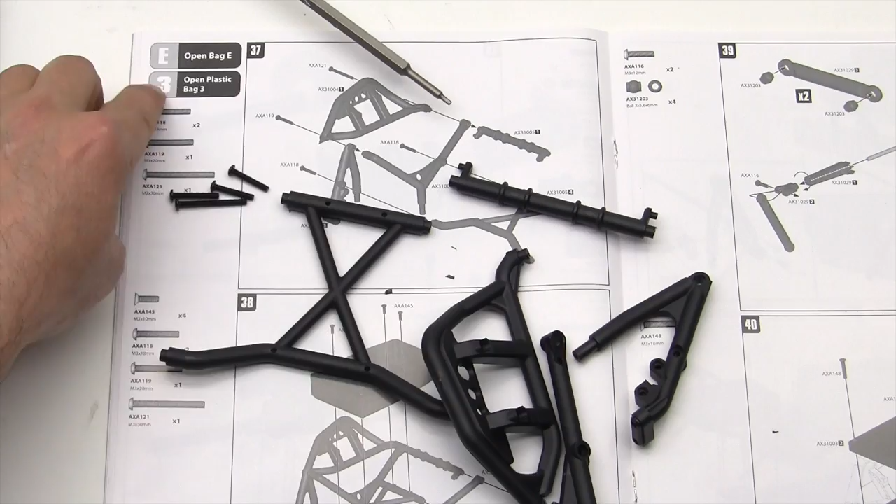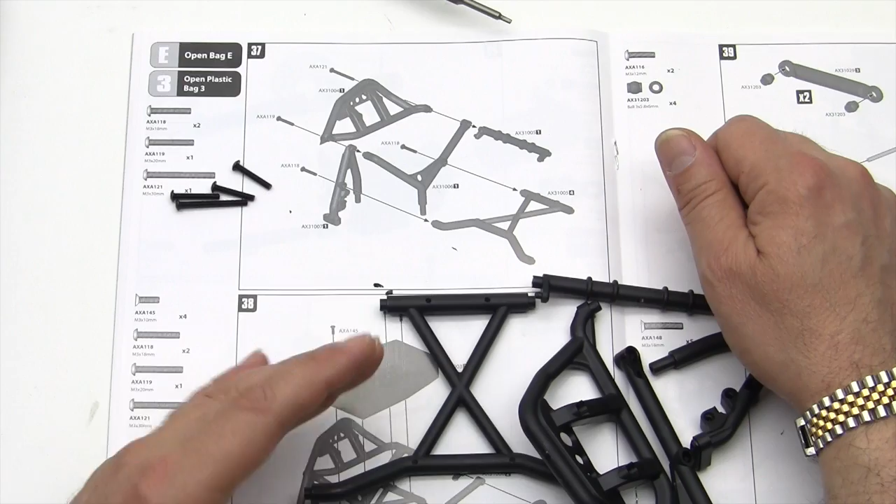All right, let's get rocking on step number 37. We're going to open bag E for the metal parts and bag 3 for the plastic parts and get all your stuff put together. Note that we're working on step 37 and most of the parts are -1 on the tree. We have -1, -1, -1, and those are all going on this side. For the next step, the -2s go on the other side, so make sure you don't get them confused.

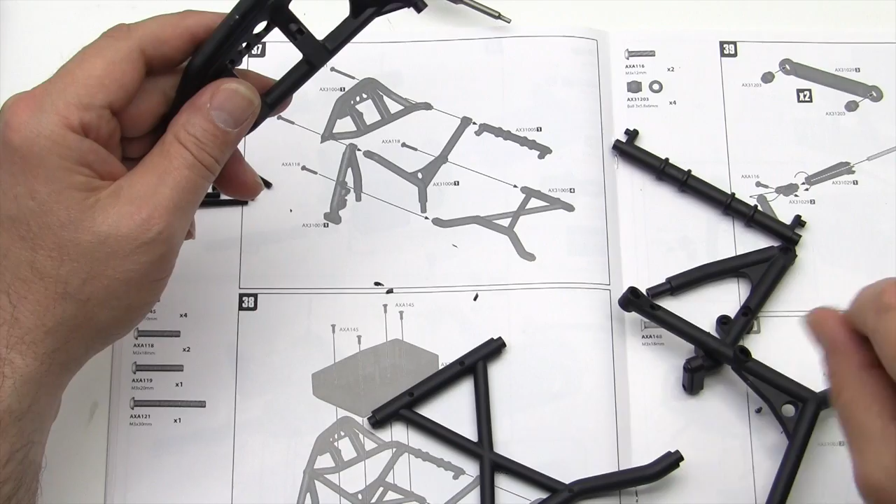Let's take the rear suspension strut holder here, and this is going to turn in this direction. As you can see, this is going to face the inside. We're going to grab the Y looking unit here, and it is going to fit in this position here. There's a little post and a hole, let's go ahead and put that together.

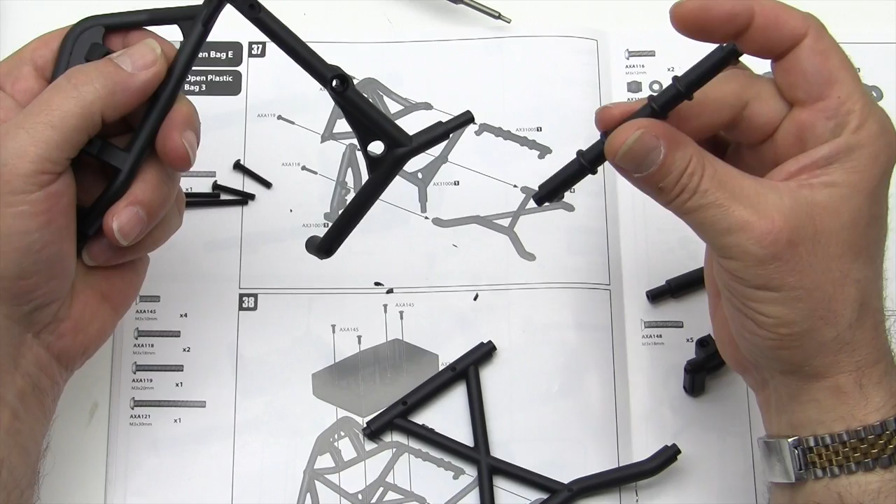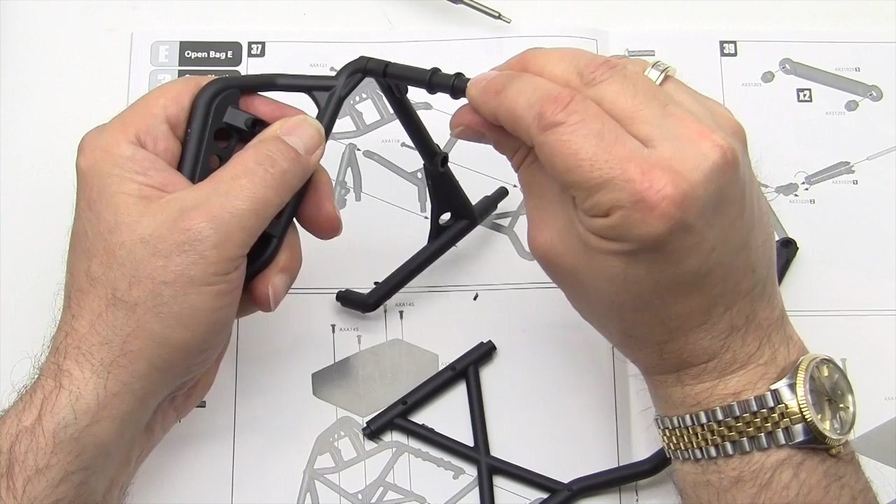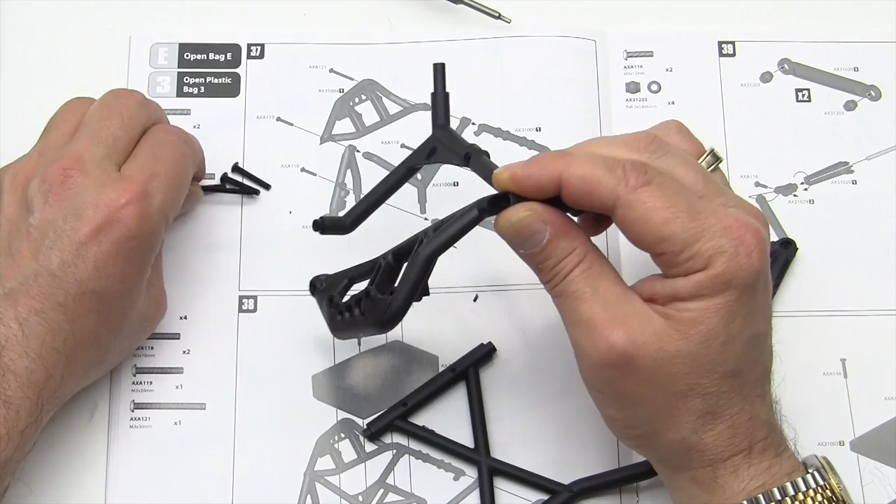And then we will grab the AX31005-1, and you can see there's little feet on here, and those go to the inside and go into these little holes here. Just like so. And we're going to take the longest screw, which is the AXA121, a 30mm screw, and we're going to insert it to hold all of these pieces together.

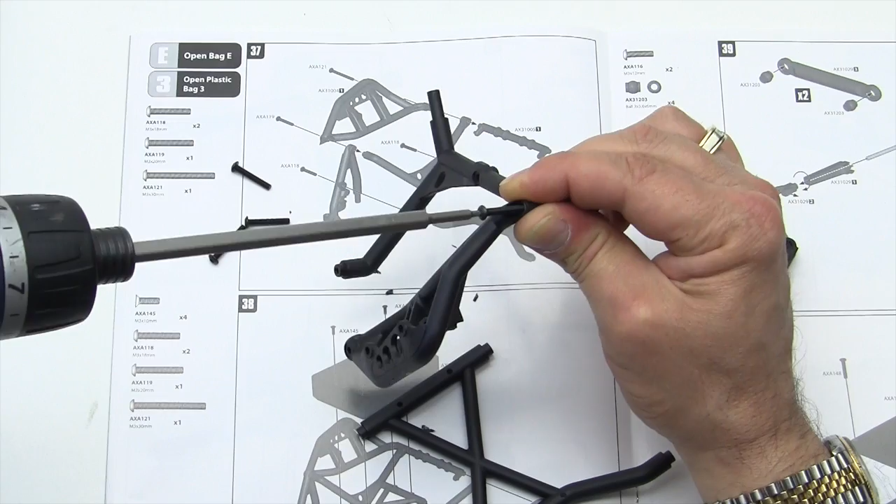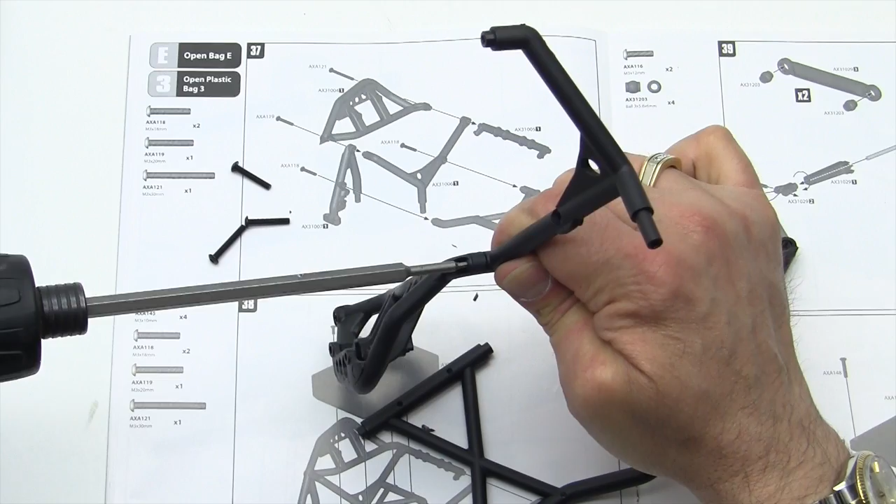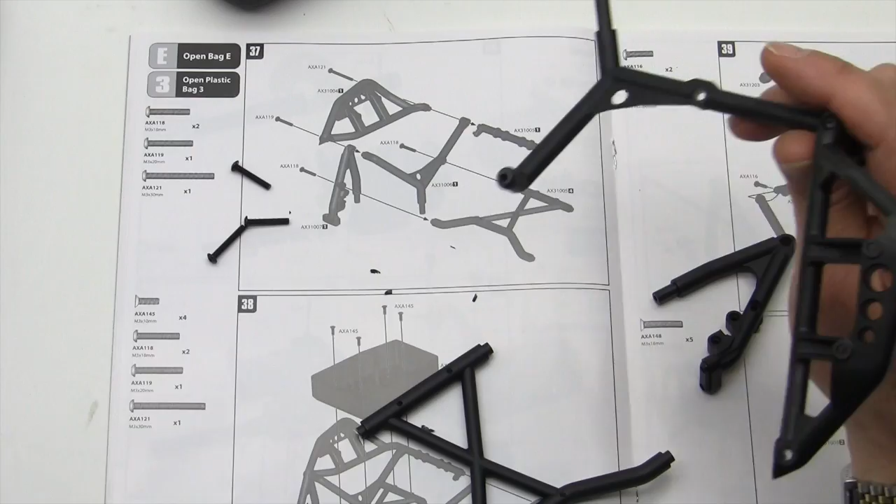You'll notice that this plastic is actually a lot softer plastic, and you're going to want to be careful that you don't over tighten anything. So just till it touches, and then follow up with a wrench if you're using a power tool, just to make sure that it's tight.

Okay, let's get everything back into shape here. This is what it looks like all held together.

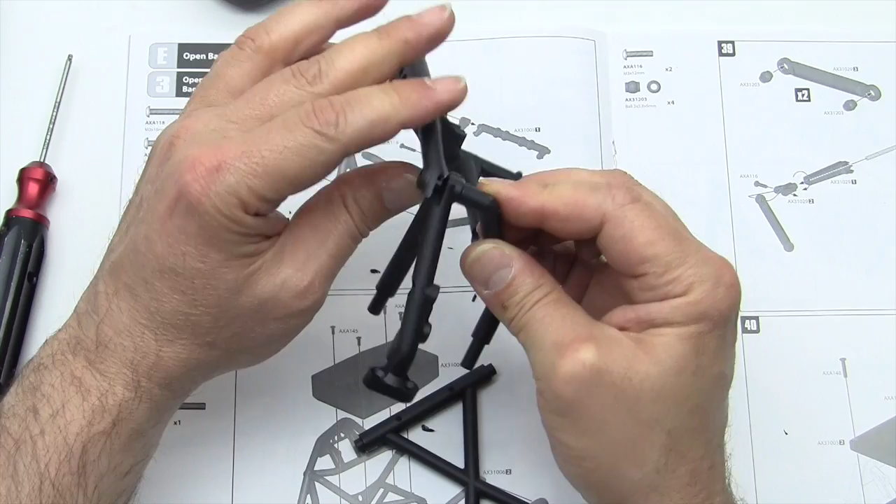Now we are going to take this piece here, and it is going to go in this direction with the feet pointing towards the back. See if you can get a better look at it here. It has a post and then it has some feet, and that is going to sandwich in between these two parts here. So we're going to press that in and then press that in. Let's go ahead and rotate that around so that everything lines up.

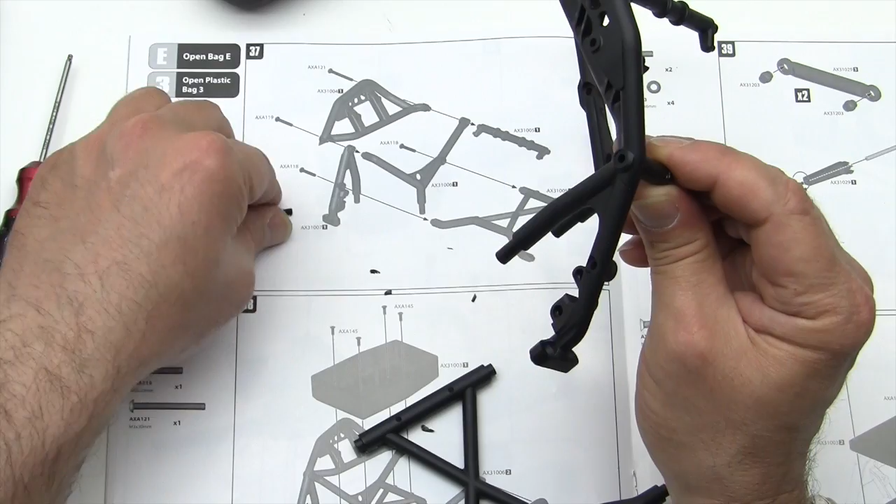And we are going to put in the number 118 screw, which is the 18mm, so it's one of the two shortest screws. Cinch that down. Okay, so that is what we have so far.

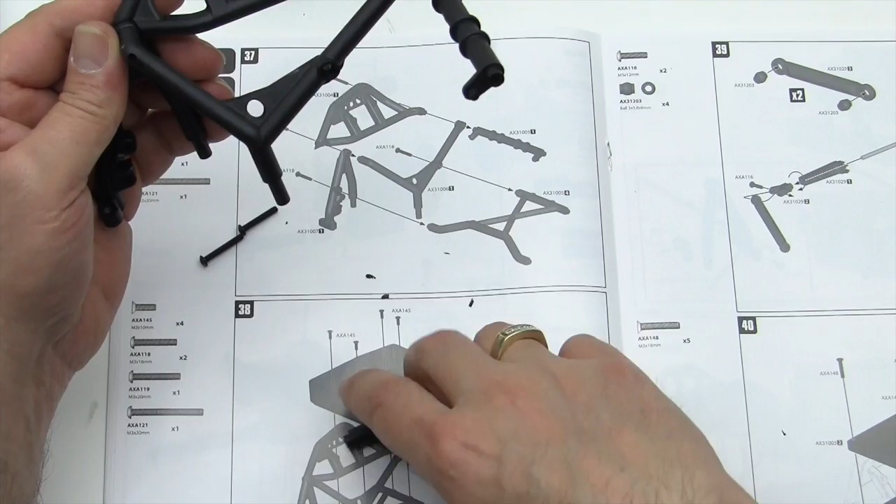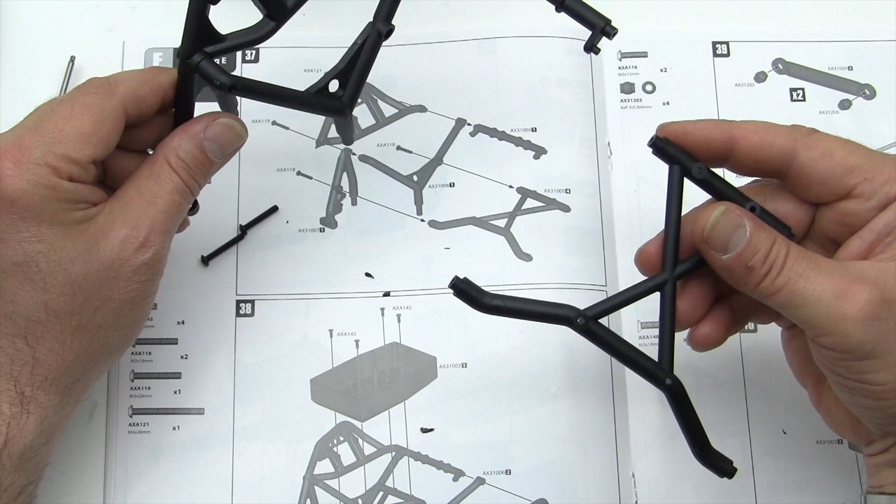Now let's take the cross brace, and let's get some of the other parts out of the way. As you can see, it comes forward and it comes down, and then we have a short end and a long end. This is going to go into this hole here, like so, into this hole here, like so.

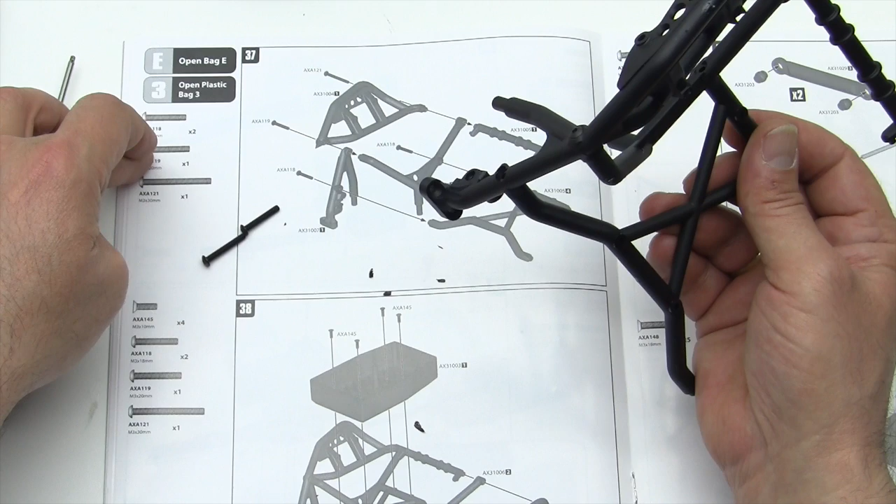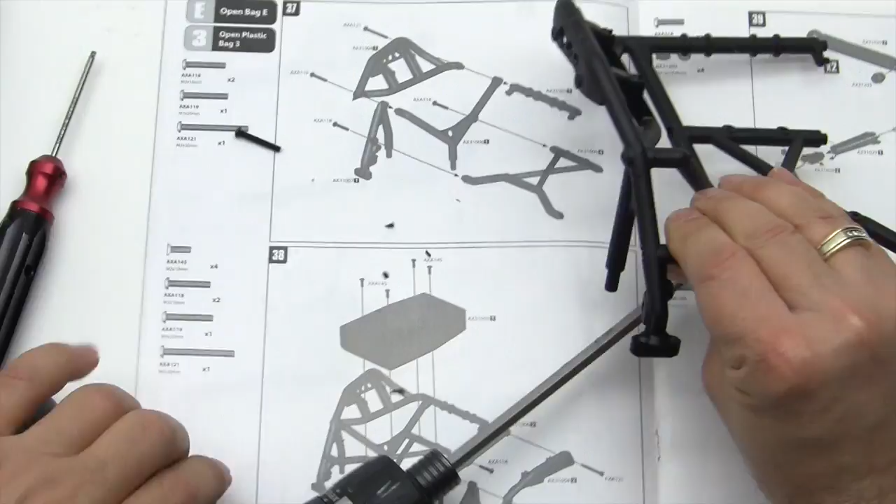Go ahead and put those in, and we're going to use... actually no, they're both the same size. There we go, gotcha. Just keep track of your screw numbers there, I got lost for a second. Cinch this down, and we will tighten this one up as well.

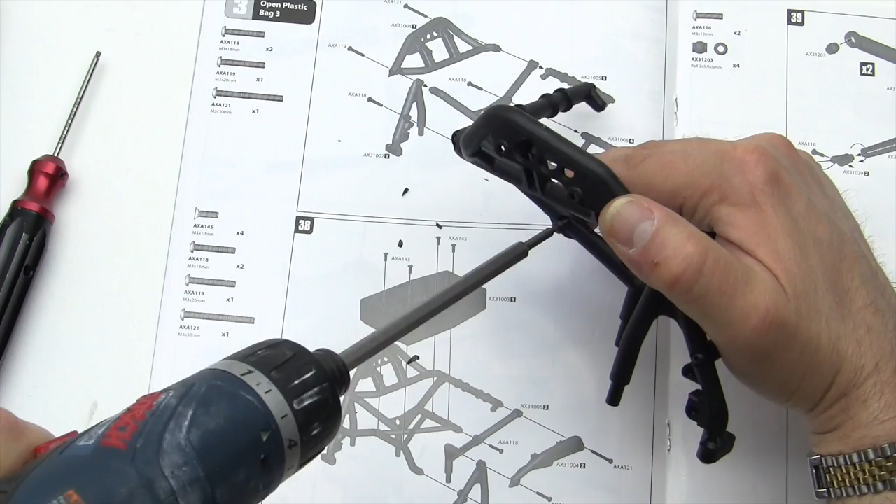And that concludes step number 37. And this is what it looks like so far.

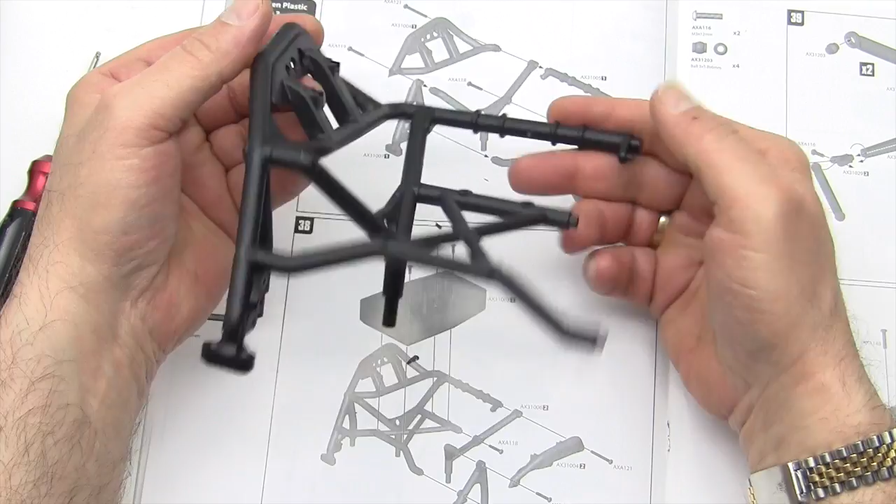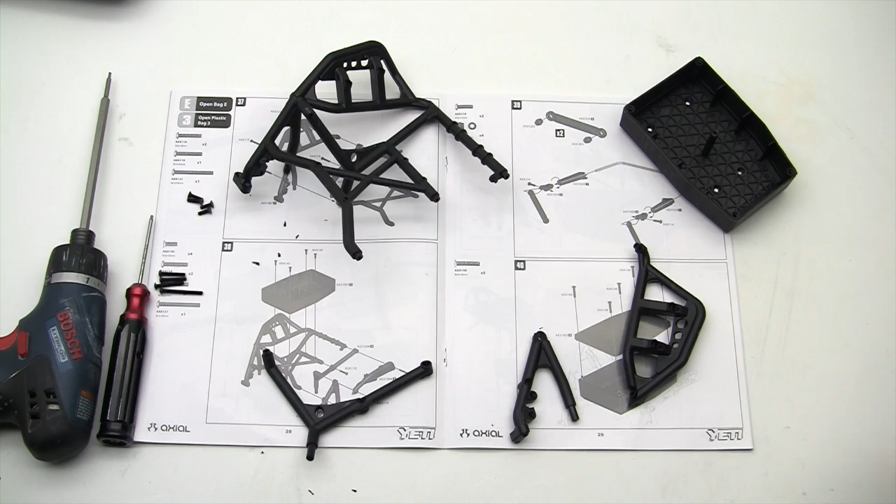Okay, we're going to gather up all the pieces and parts and move on to step number 38. Let me back the camera out a little here for this next step. It kind of looks like a puzzle to me here, we're going to have to put all this stuff together. We're just basically mirroring what we did on the other side. Looks pretty straightforward, just got to figure out which pieces we want to put on first.

So let's go ahead and put on this brace, and again we're just mirroring the other pieces. Make sure you use the right size screws. I sure like using electric tools when it comes to these roll cages, just seems to make things go a lot faster for me.

Okay, so we have this piece. Now we need to put on this piece. We'll go ahead and put that one in here, and also over here, so we're going to attach these two points.

Make sure I'm not missing anything, making mistakes. I didn't quite pull those pieces together. I have the clutch set fairly loose on there so that I don't strip out anything.

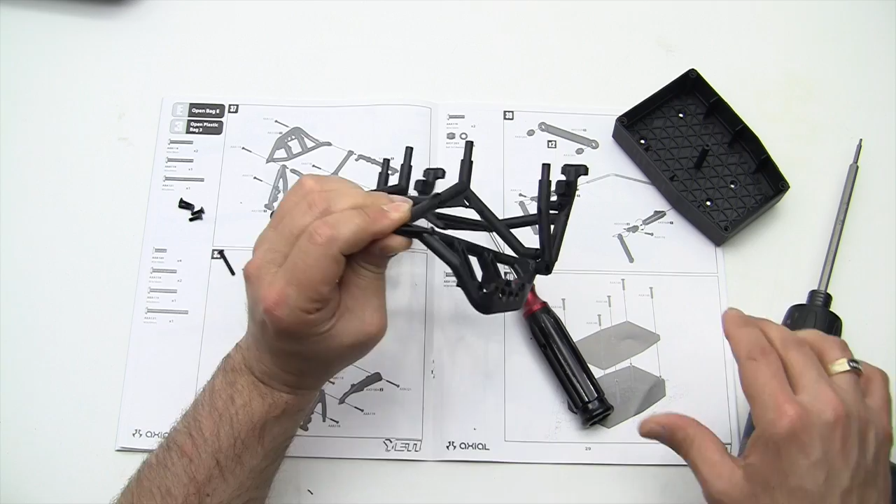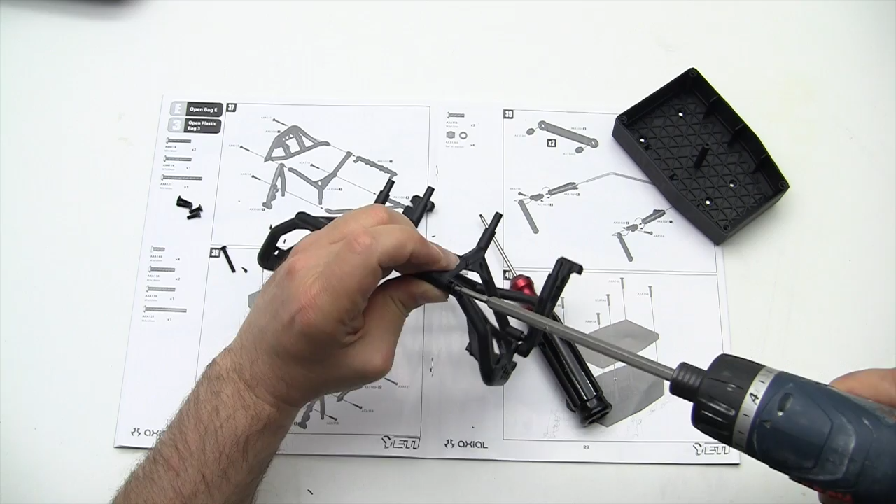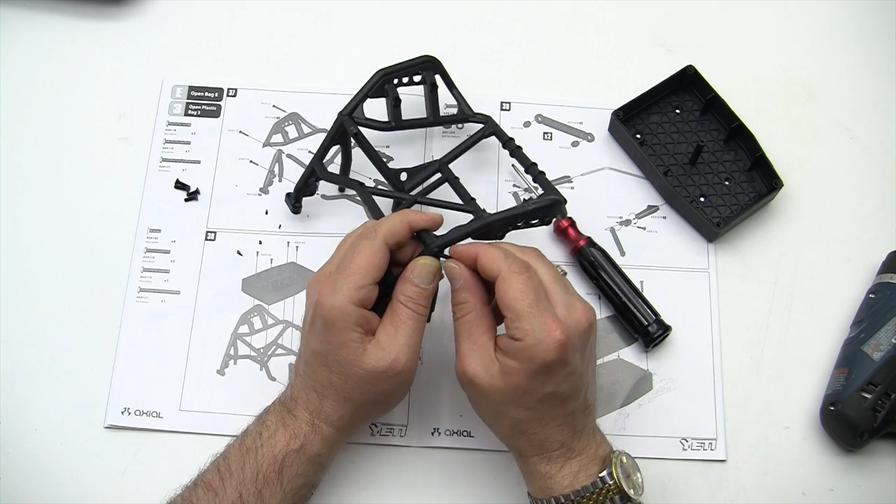Okay, now we are going to put these 3 pieces together here. This one into here, this one into here, and a screw. Yay.

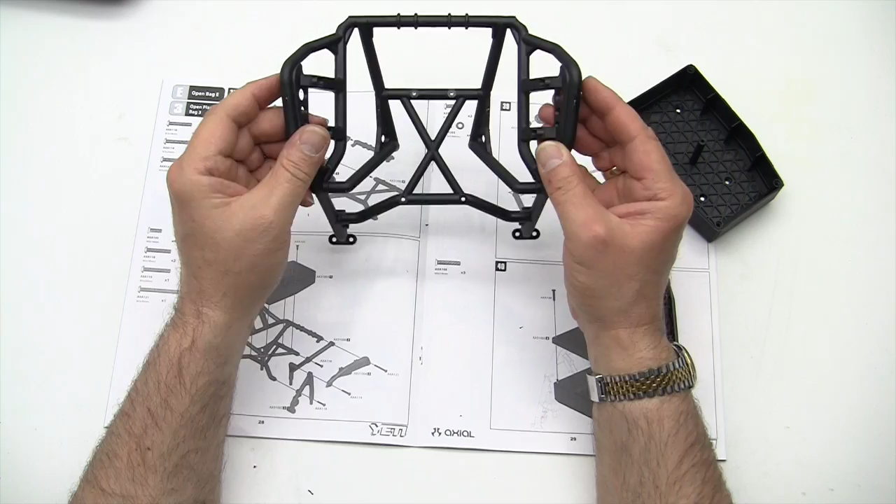Feel like a puzzle builder. So far, this is what we have. Everything should be nice and tight. If you notice, a lot of the plastics we were working with earlier were very hard and stiff, and these plastics are much, much bendier. How's that for a word? Bendier.

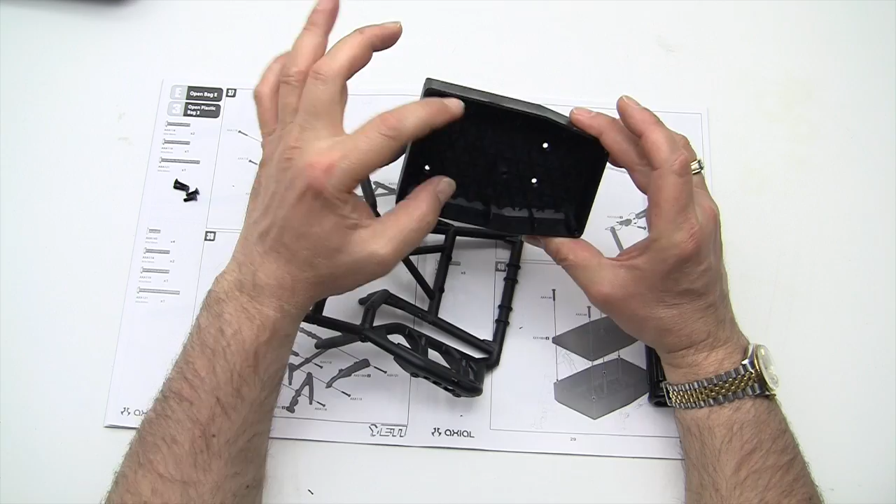Okay, now we got to figure out which way this goes on. 2 wider holes are here, skinnier holes are here. So that means wider holes there and skinnier holes here. So this tapered portion goes towards this back brace. How's that?

Go ahead and get these lined up and put in. Got to loosen up the clutch because we're only working with smaller screws now. Too loose. There we go. Then we got the 2 holes back here for these 2 screws.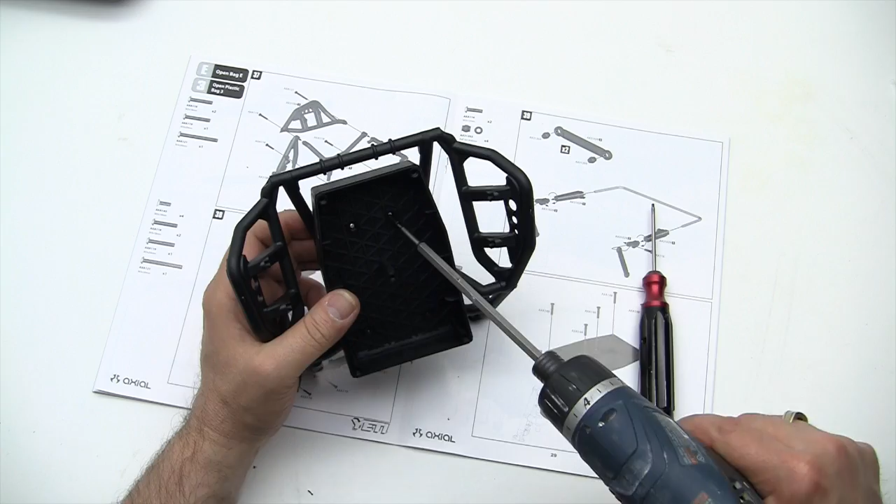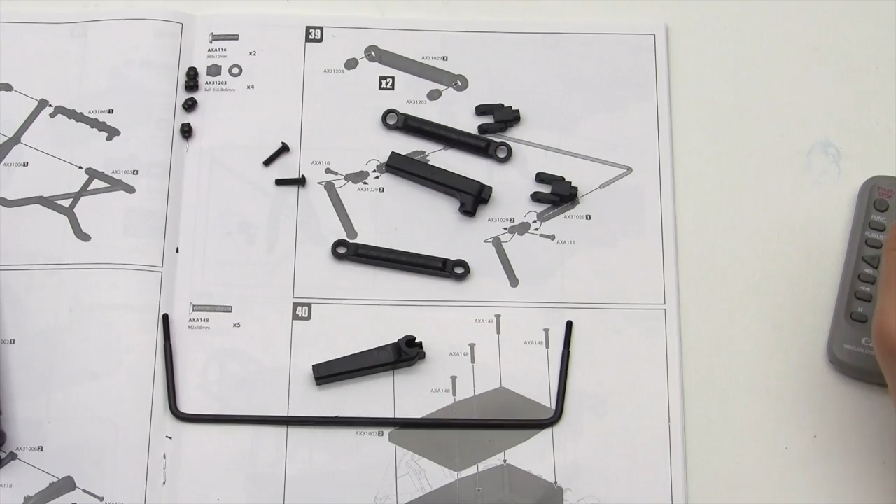Okay, so much for that. And voila, we are done with steps number 37 and 38. We'll get all of our pieces and parts out, and we will get started on step number 39. Wonderful, step number 39. Here we go.

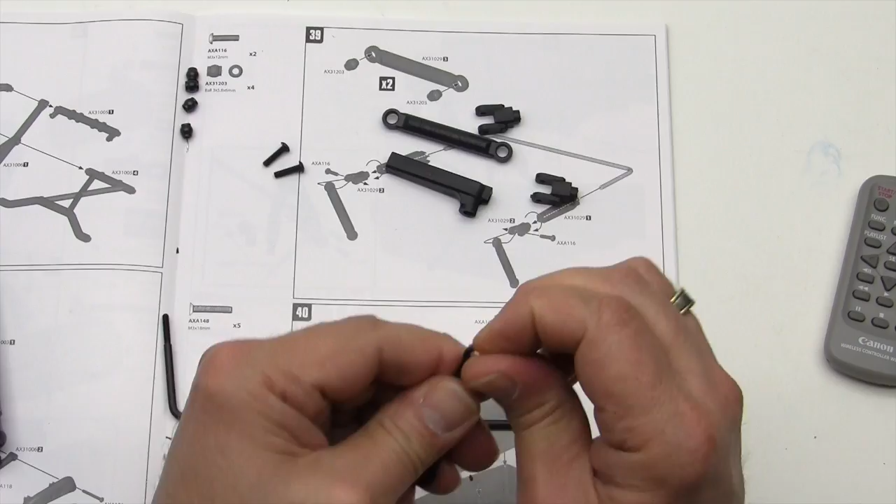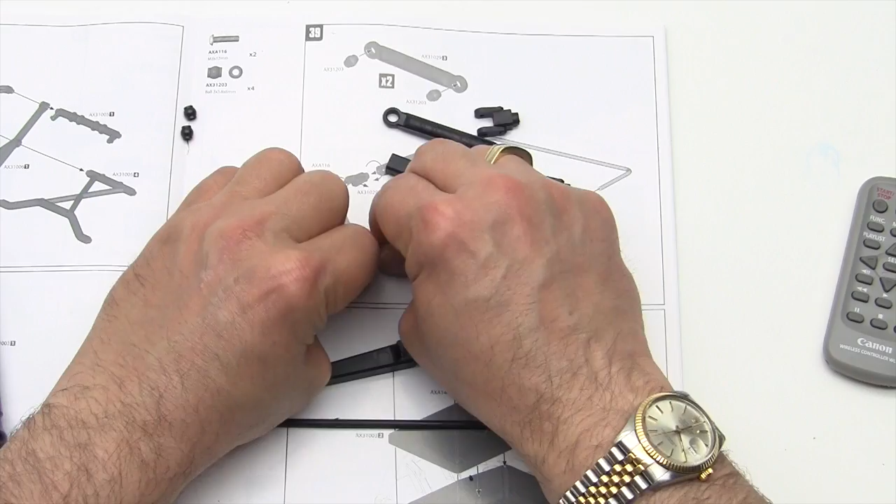Okay, looks like I forgot to take a little piece of tree sprue off there. Let's go ahead and insert the 4 little swivels into our 2 parts here. Got 2 identical little stabilizer links here. I believe that's what they are for the roll bars. Or for, I can't talk today.

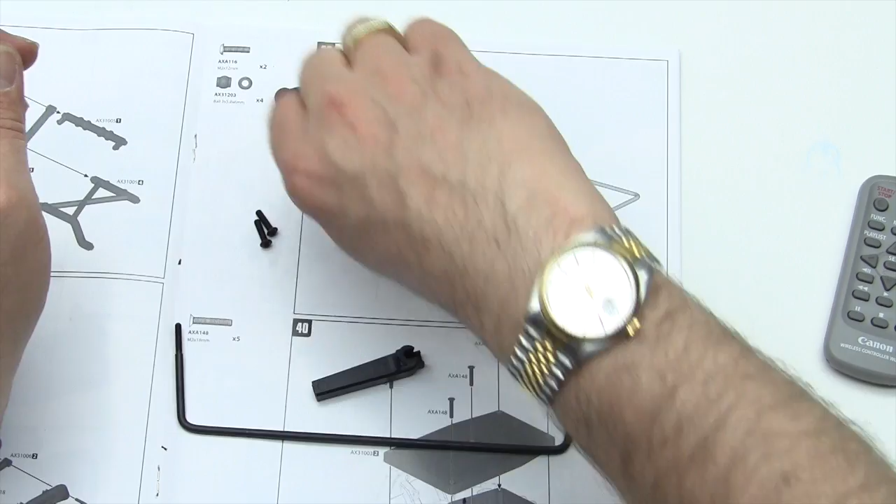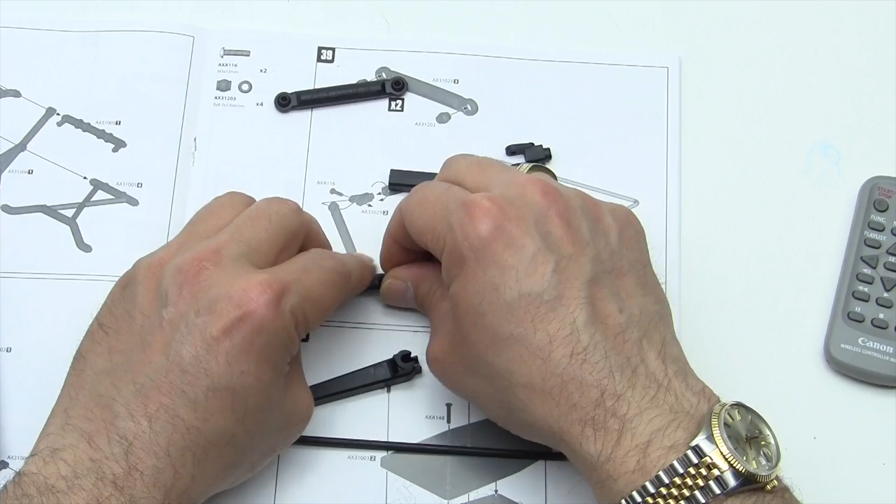Okay, we're going to get these put on. Okay, got those done. Those are these units here. Now we need to see how this is going to work.

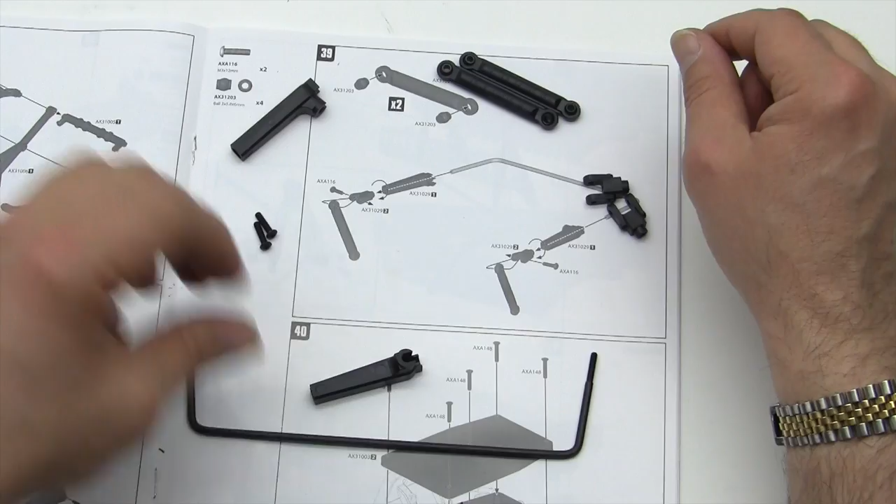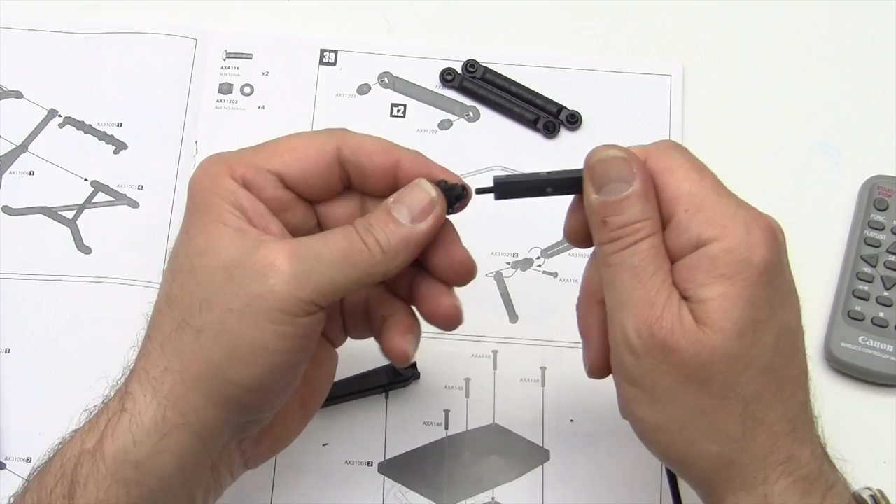Okay, let's put these together just like so. Slide that on. Then I am going to twist on this end here. Looks like it's universal, so it doesn't matter how it goes on. So we're going to screw that on until it cinches this all down.

You can see that that's loose back there. This is not a roll bar, it is a sway bar, now that I've found my words. So go ahead and push that all the way back, screw this on until it touches, and it's going to secure that.

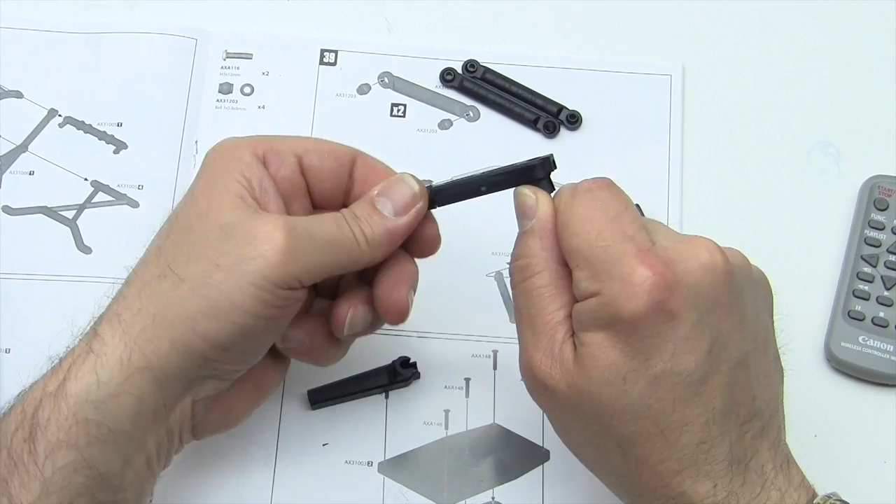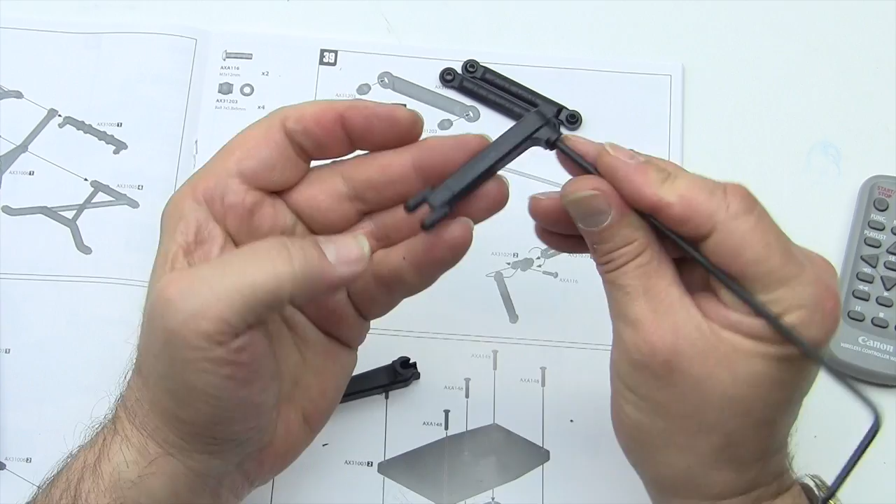Still a little loose. We'll go one more half turn. Still a little loose. Here we go. We just don't want to over tighten it. Okay, so it's going to look like that. We'll do the same on the other side.

Doesn't take that long. That's a big sway bar. Pretty massive.

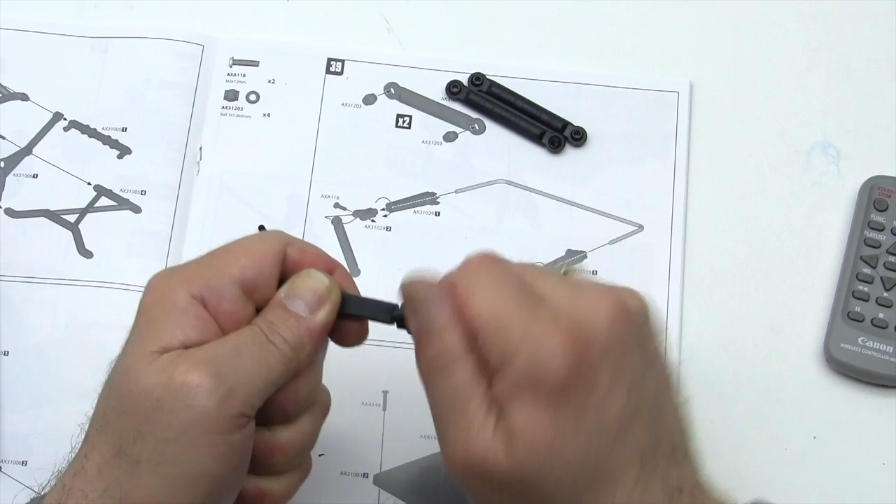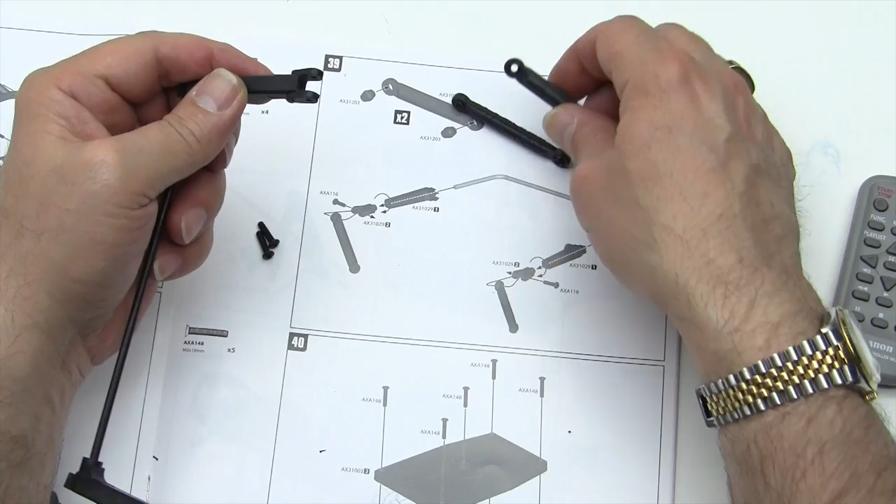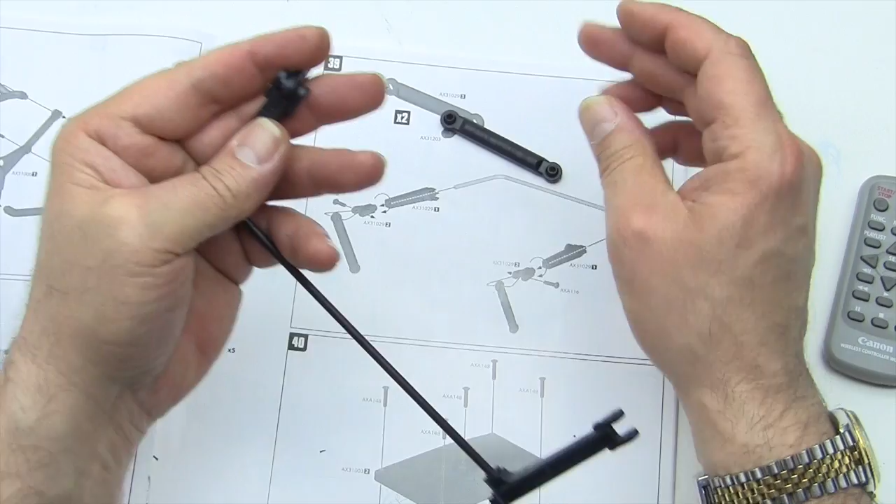Alright, now we are going to screw one. Oh, I forgot to take another tree spar off there. Okay, now we're going to insert one of these, doesn't matter which way it goes, and put a screw in. That has to be threaded.

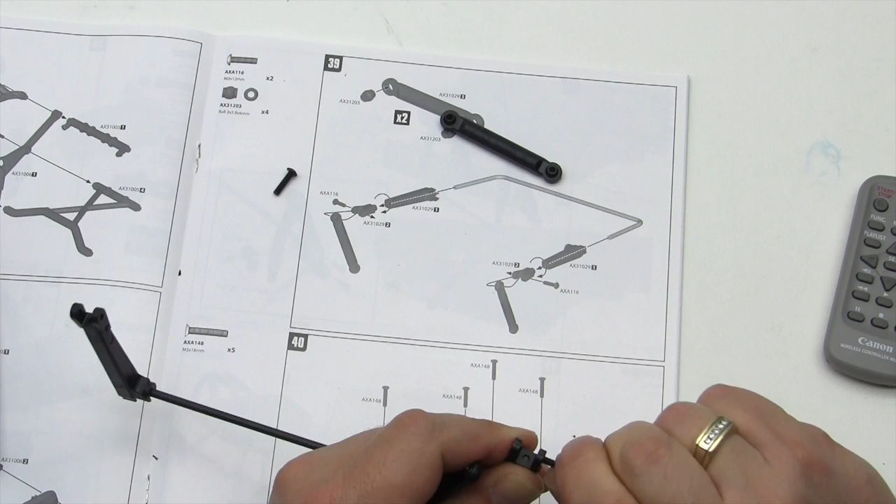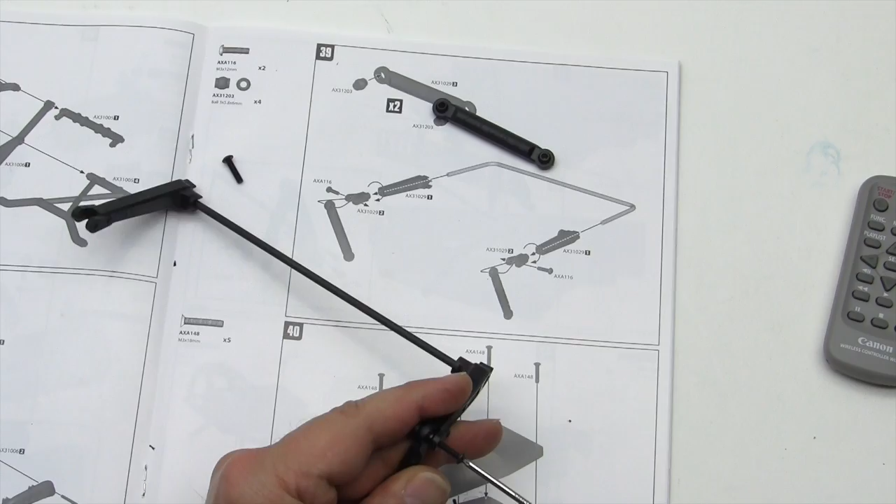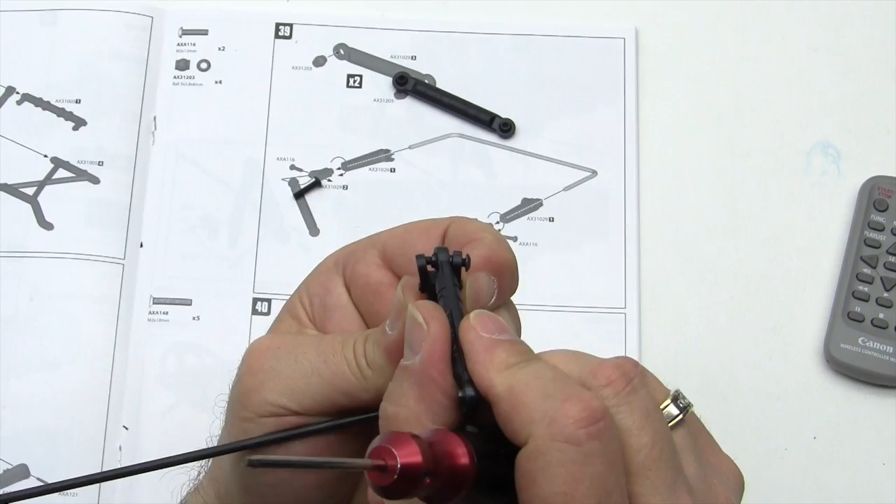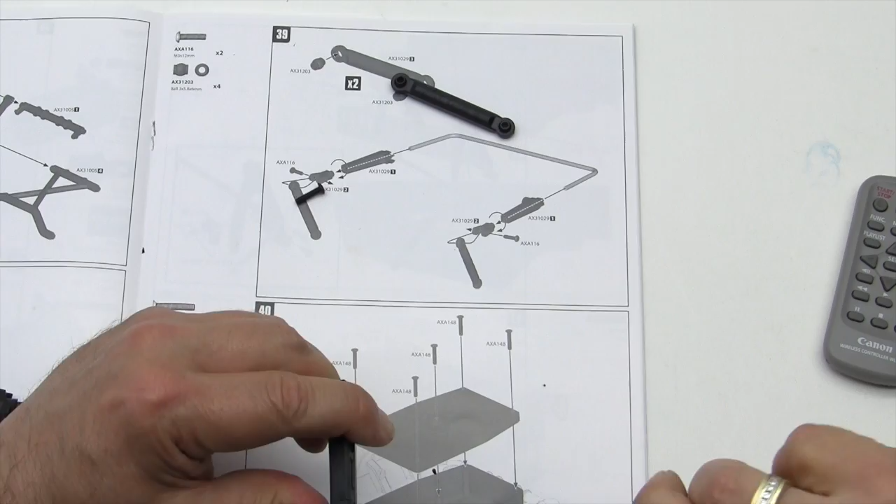There we go. When you screw these in, just screw them in. You want to make sure that it actually does get threaded into this rear part. As you can see right now, it's kind of pushing it apart. It's not threading in, so you want to make sure at the end of the day that you actually did get it threaded into the back half, which is not wanting to happen at the moment. So I'm going to back the screw out and try to hit that thread again.

It's just not wanting to thread in there. Yeah, there we go. I got it that time.

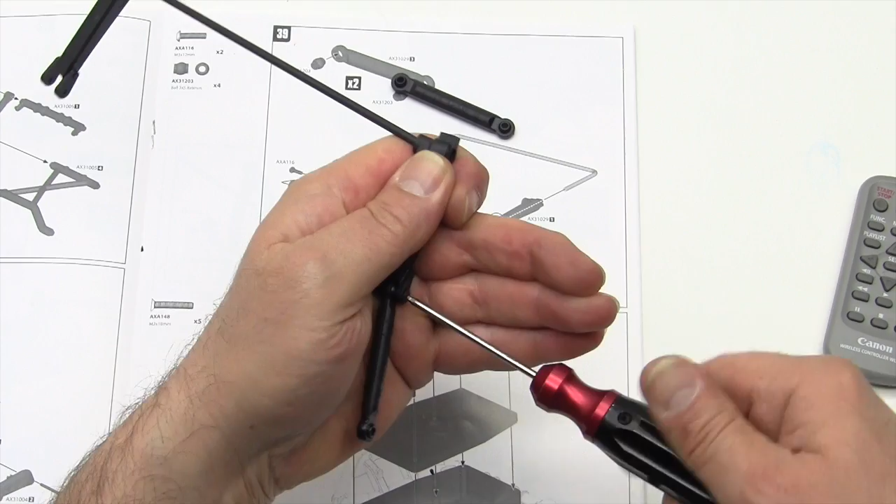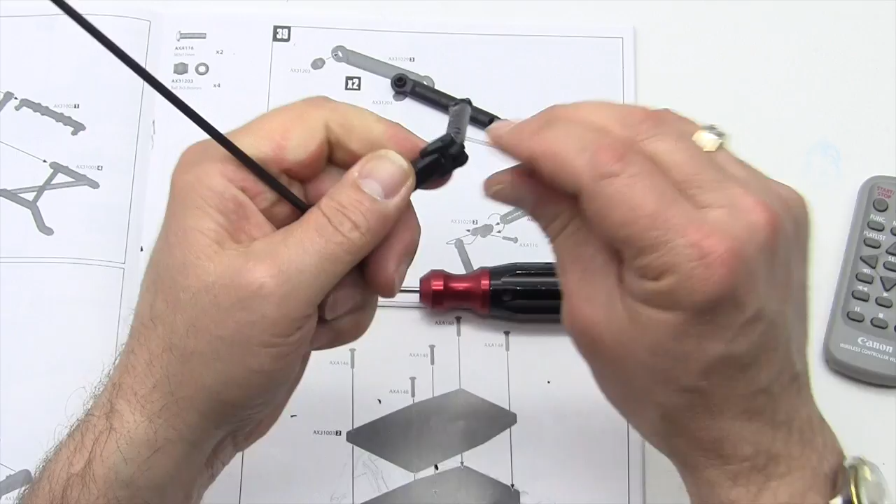Okay, I just screwed it in till the thread just should be just about even there. You don't want to over tighten it. Let me back it out a little bit. We'll just make it even, and you need to make sure that these are free. So go ahead and do the same on the other side, and then we'll move on to the next step.